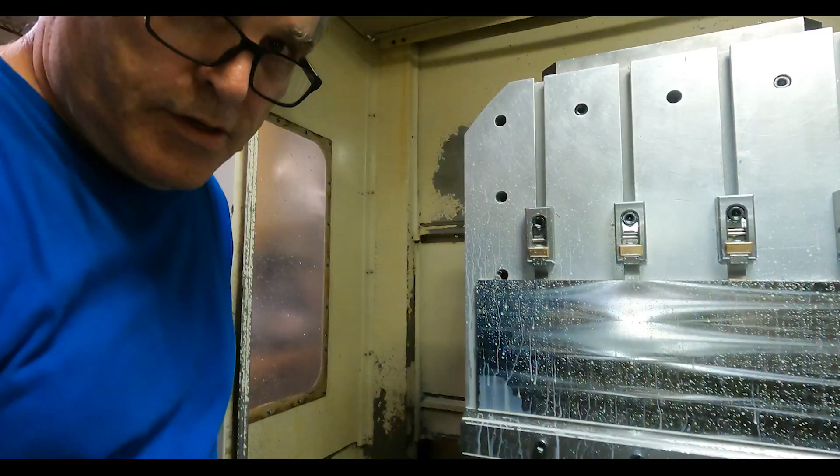I'm still finishing up the last one of these titanium plate things while I'm making this video. But there were enough questions, I think, to warrant a separate video on this subject. And I didn't want to add it to that titanium video, facing the titanium plates down, because the video was just getting too long. And generally speaking, according to the analytics, people don't get to the end of the videos much anyway. So I thought this might be better for the people that had these questions.

So let's look at a CAD model and see what my ideas were with this toe clamp. All right, there were some questions in the comments on the construction of this clamp, on various things on how it worked, and so I thought I'd do a video. I kind of promised to do a video on the last video, but there wasn't time. The video got kind of long, and so I thought I'd do a separate video here on it.

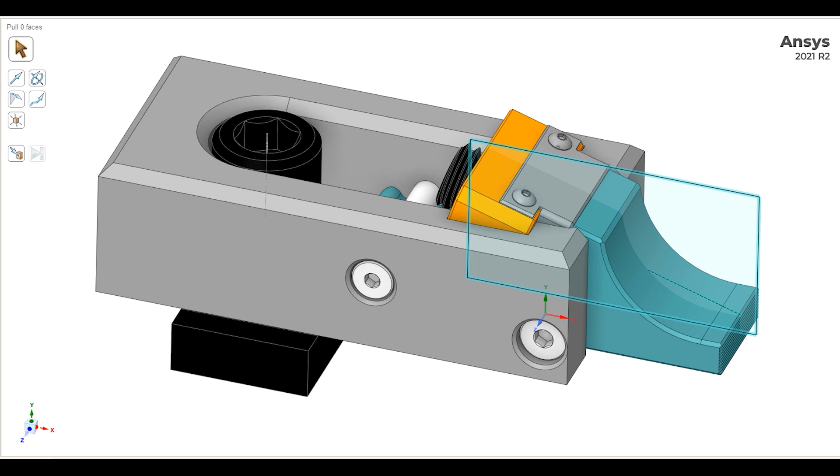So I've defined a plane here so I can cut a section through the clamp, so we can kind of look at what's going on here and why I did certain things. I'm going to zoom in on the basic mechanism here. This is just the screw that holds it down to the table. Well, there were comments on how this was so far back, and it is kind of far back in relation to the clamping end, I guess you'd say, of this thing, but it hasn't turned out to be a problem.

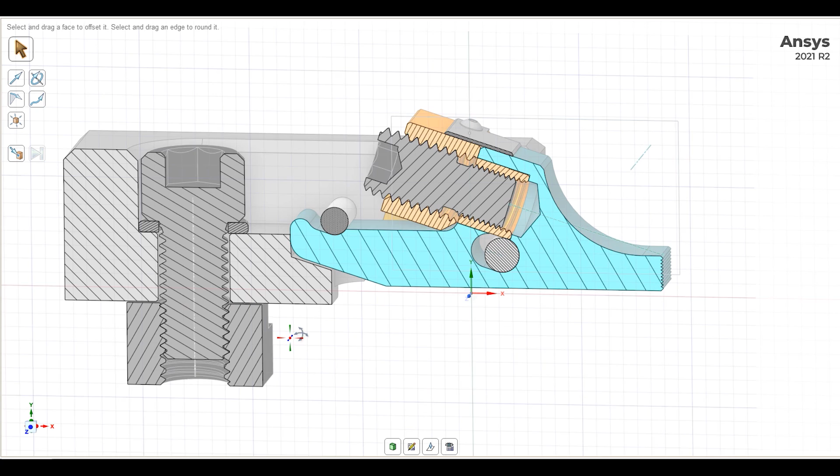When I tighten these down, I don't notice any lifting of the front end of the body of the clamp with the screw back that far, so it hasn't really been a problem, probably because of the low angle that this pushes forward at. And this is what I was thinking when I designed this thing. I kind of drew an angle here, and I tried to fit things in, and I started at about a 20-degree angle with this, and it actually ended up being 17.5 degrees in the end.

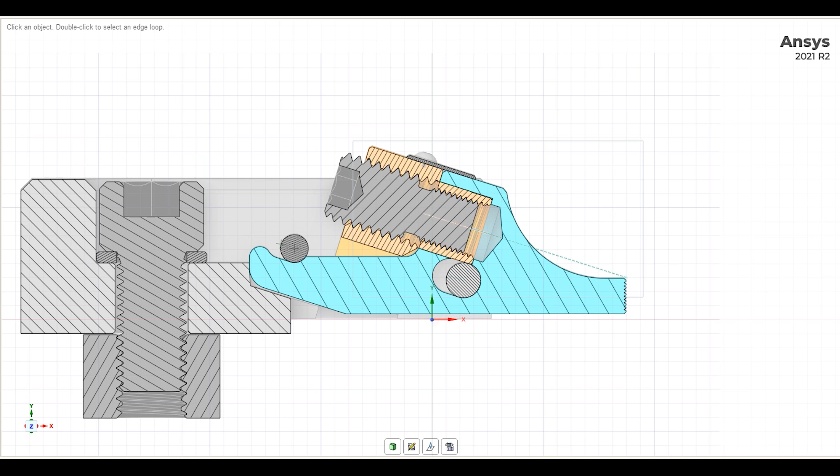I had to be able to fit my wrench in here with the socket driver, an Allen driver, so that I could tighten it. And so that kind of dictated the size and everything of this, and the distance between here and the screw. This probably could be shortened a little bit. After looking at this model, I think I could have moved this pin forward and shortened the back end of this, maybe another 5/8 of an inch or so, or maybe not that much, maybe about ½ an inch.

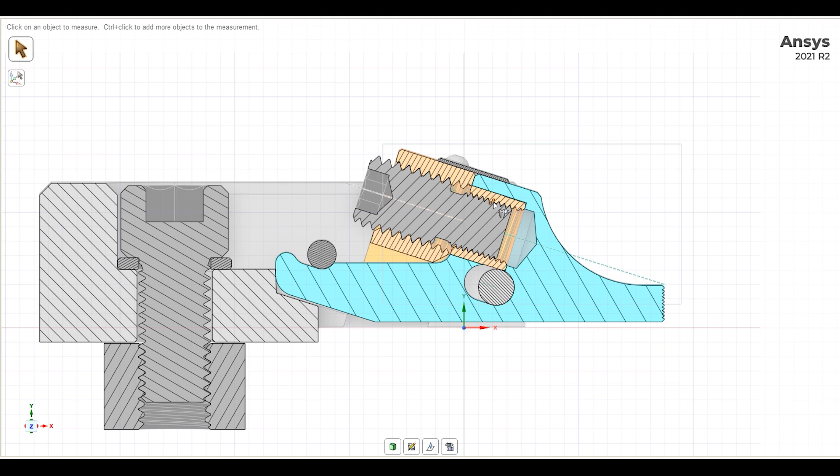If we measure the distance between here and the end of one of these serrations, it's about 5.446. So I probably could have shortened it up to maybe 5 inches long if I worked with these relationships. This all could be scaled down. Actually, this is a pretty big clamp, and this is a big screw. This is a 5/8-11 screw and a 1/2 thread here, so this could all be scaled down quite a bit if a person wanted to.

But there were questions on what I referred to in the video as a compound screw, but actually it's more accurately called a differential screw. If you search on the internet for differential screws, you'll see drawings that are similar to this. So the way this works is that we have a 5/8-11 thread here, which has about 90 thousandths lead per revolution, going into a 1/2-20 thread, which has 50 thousandths lead per revolution.

So when you're threading this screw forward, it's losing 50 thousandths of its pitch because it's threading into this 1/2 inch thread, but it's still moving forward the difference, which is 40 thousandths of an inch. So I think it worked out to the equivalent of a 25 pitch thread threading forward, because 1 inch divided by 40 thousandths is 25. So that gives a real nice feel and a lot of force available because it amplifies the force.

These differential screws can be made in various different ways. Like if you had a left-hand thread here, then it would thread out faster per revolution than with the right-hand thread, because it would be adding to the lead actually. And if these leads were very close to each other in pitch, you could have a very fine movement, which I think they use this mechanism on like microscope focus adjustments and things like that.

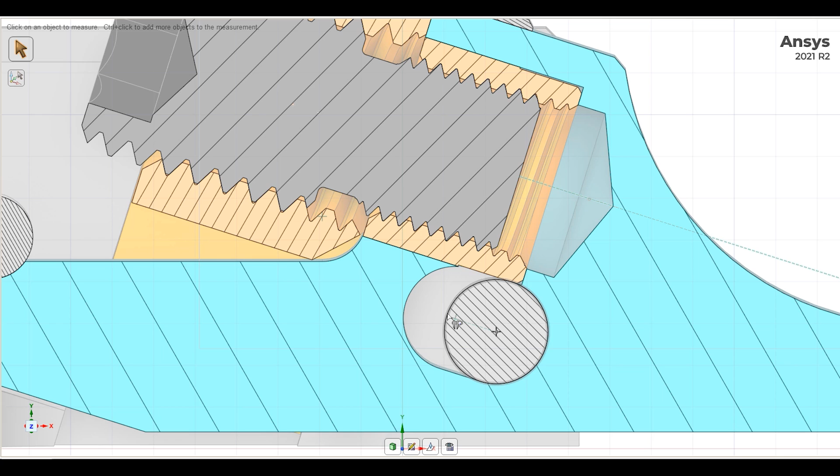And it's got 1/8 of an inch of movement because this slot here, this is a 5/16 socket shoulder bolt here, and this is a 1/4 inch one back here, and there's 1/8 of an inch of gap here in the slot.

So I designed this so that I knew this jaw was 1 inch thick, and I could mill this in here with a 1/4 inch end mill without too much difficulty to get that slot, and then I could just mill around this profile here, as you saw in the video, and that was pretty easy to do. And so that's kind of the way that screw works. I hope I've described that in a way that could be understood.

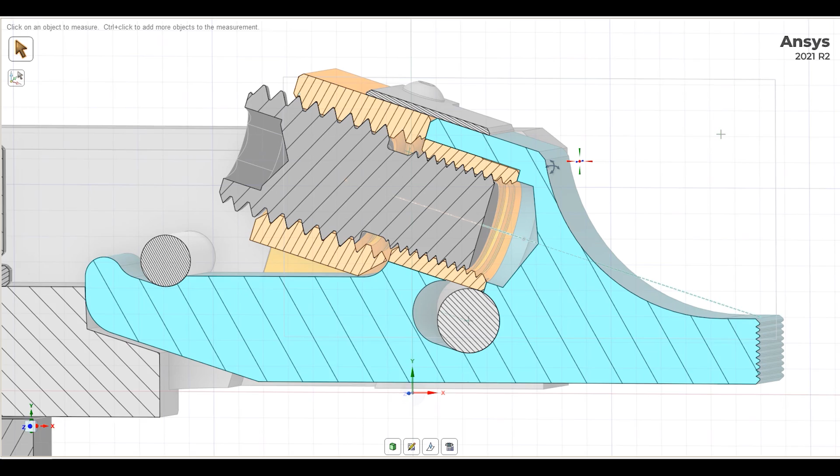I had to also make this nut separate. Originally I drew this up and I just put this thread in this moving jaw, but then I got to thinking about that after studying the model a little bit, and it wouldn't be able to be assembled. And when I posted that on Instagram, Robin Renzetti even pointed that out to me, but I'd already kind of figured that out. But in a way that was most ideal, because that allowed me to make both the nuts out of bronze.

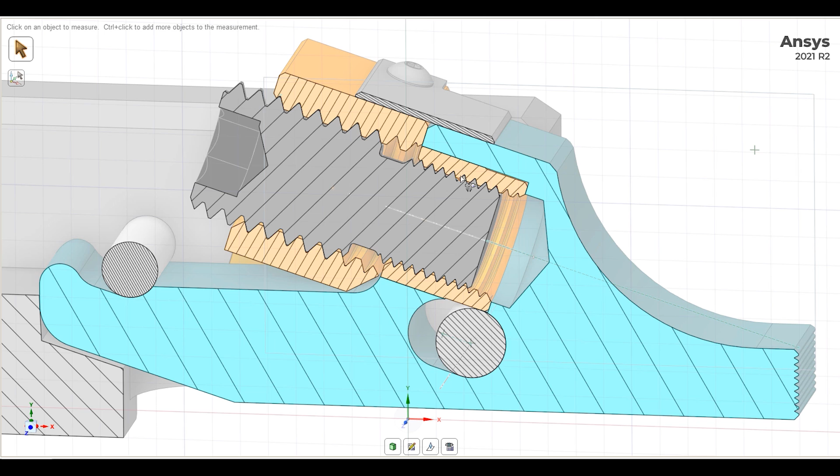Oh, that was another question. What were they made out of? These are both made out of aluminum bronze and the steel set screw, and the steel set screw is hardened a little bit. When I machined it, I could tell on the lathe it's a little bit hard, not real hard, but a little bit. And it has a very nice motion. You put a little grease on these threads and they have a very smooth motion to them.

But it's necessary to have this rear pin here. This was another question. Why do you need that one? Well, the force of the screw, I intentionally wanted it to intersect the very top of this jaw over here. So if I drew a little model of a part here. So if we look at this, when it's pushing right here, it's going to want to pivot this jaw downward around.

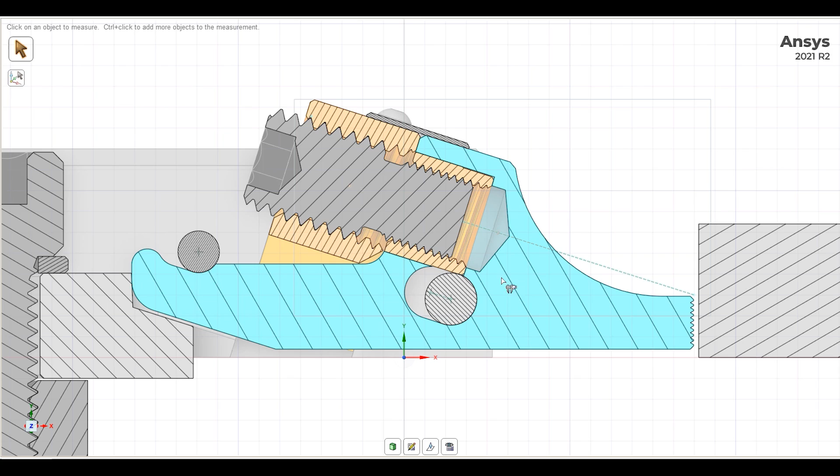It's going to pivot around this 5/16 shoulder bolt, and that's going to do two things. It's going to put the thread in a bind. It's no longer going to be coaxial to the other nut in the moving jaw. And so I needed something to resist that rotation, and I put this 1/4 inch shoulder bolt back here, which is in essence just a pin, and it's riding along this ramped surface of the jaw back here. And that has all turned out to work really nice, actually.

In actuality, when I use the clamps, the only change that I've added is this shield thing here. Let's go back to the full model. The shield on the top here, which would cover up this gap, because this gap opens up when the jaw moves forward, and at the maximum extension it can be 1/8 of an inch gap here, and shavings could get in there. So when you back the jaw, it might be difficult to back up.

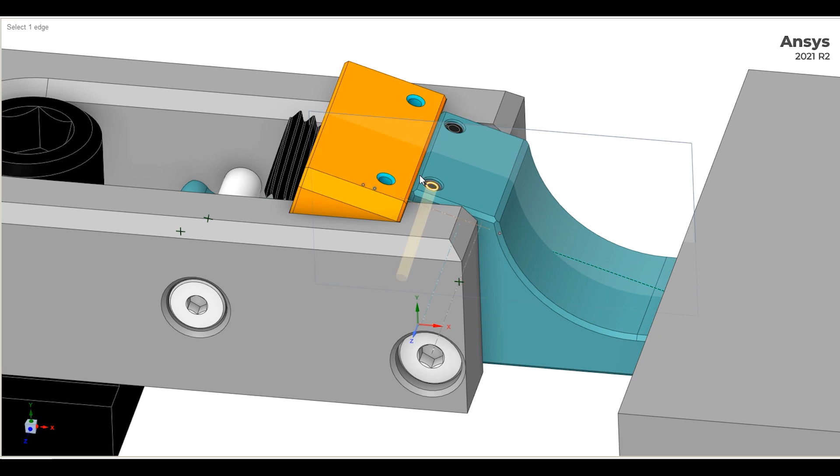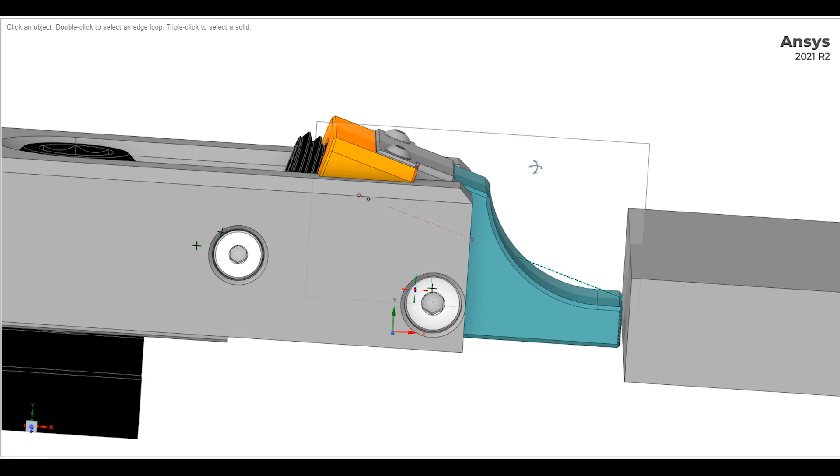In the vertical position, I've been using them on the horizontal mill, this hasn't been an issue, but if these were laid down flat on a vertical milling machine, that would definitely cause problems eventually if the shavings were small enough to get in there. So this shield, I think, will more or less eliminate that problem. I just have to make that modification to my clamps. So I don't know if I've described that.

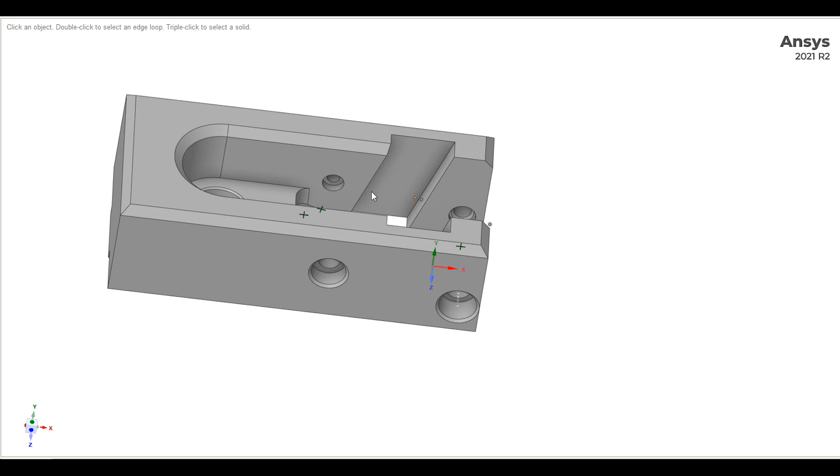On top of what I've shown, the only other issue is I had to be able to assemble this into the actual body here, and that's the reason these slots and the nut is made like this, so that I could put the moving jaw together with the nut, as you saw in the video, with the screw holding all that together, and drive roll pins down these holes, and then I could drop the whole thing into the base piece here and put these shoulder bolts through, and that would hold the whole thing together. That's kind of the reason it's made this way.

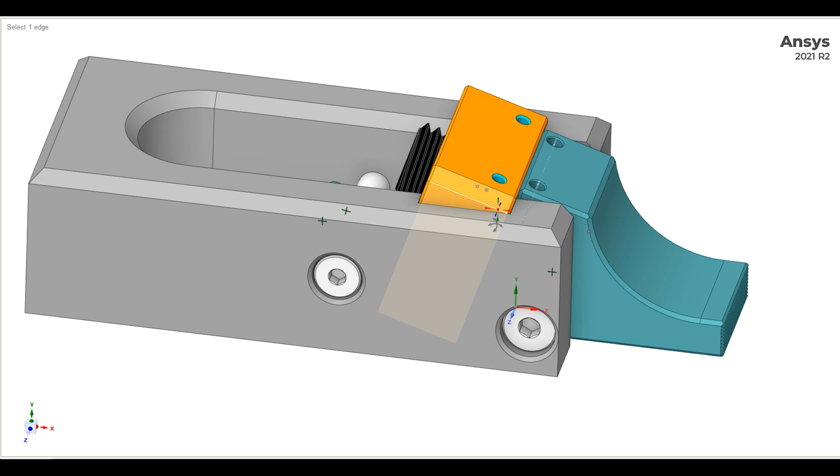And it does actually allow this bronze nut to slide up and down a little bit if necessary, although theoretically it shouldn't be necessary at all. But I haven't made things fit real tightly together here on purpose so that it would move nicely. So I hope that explains this better, because there were quite a few questions in the comments about this.